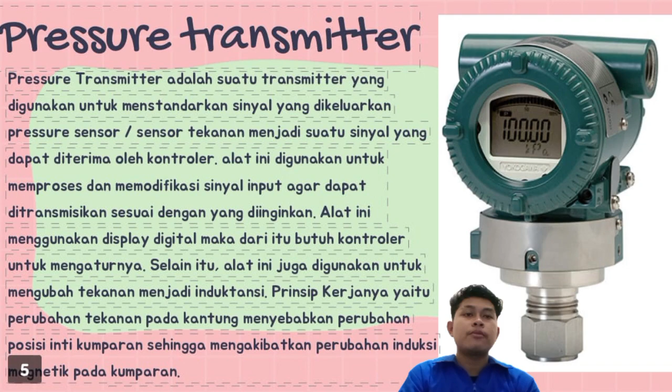What is a pressure transmitter? 1. Physics. Pressure, P, is defined as the amount of force, F, acting per unit area, S. 2. Types of pressure: absolute, gauge, differential.

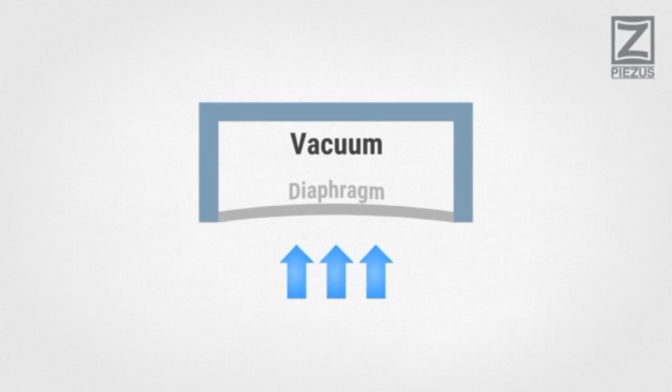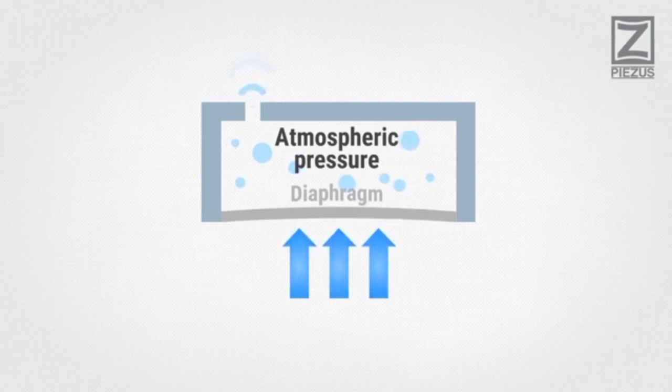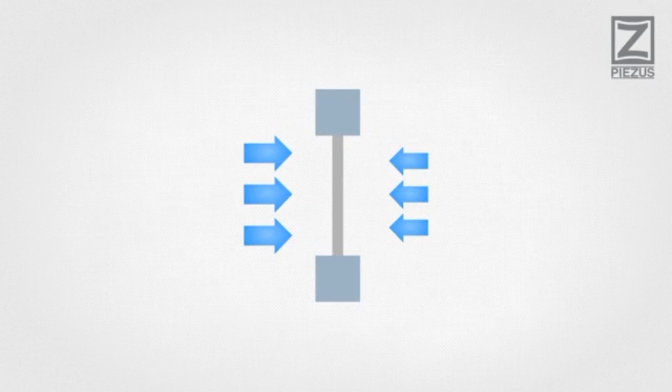Measuring absolute pressure. Absolute pressure is measured relative to vacuum. Measuring gauge pressure. Gauge pressure is measured relative to atmospheric pressure. Measuring differential pressure. Differential pressure is the difference between pressures applied to the opposite sides of the diaphragm.

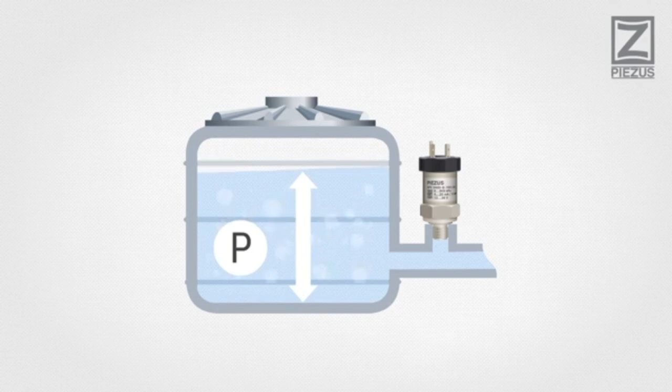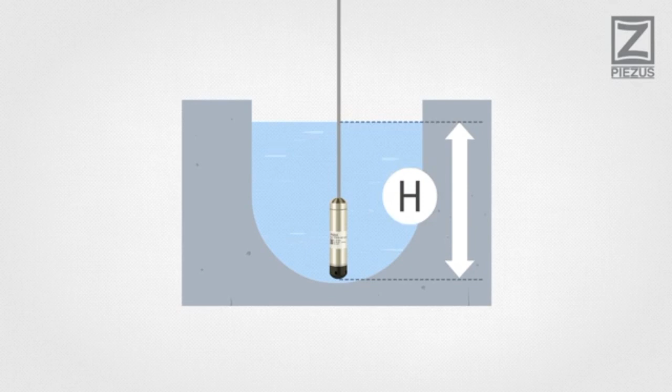3. Types of pressure transmitters. There are two most popular types of pressure transmitters: externally mounted and submersible. Externally mounted pressure transmitters are used for measuring pressure and level of liquids and gases and usually have a thread or a flange mount. Submersible pressure transmitters are used to measure level of liquids. They are also called hydrostatic level transmitters.

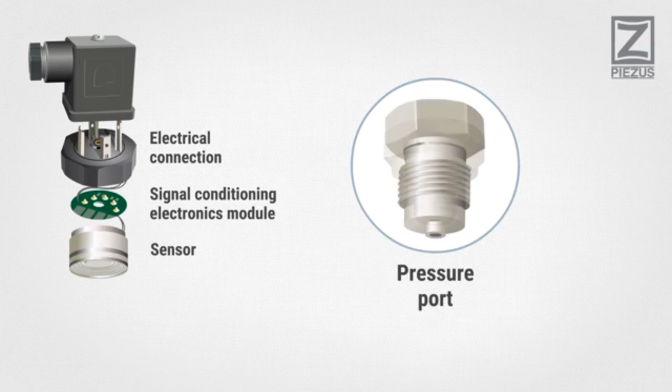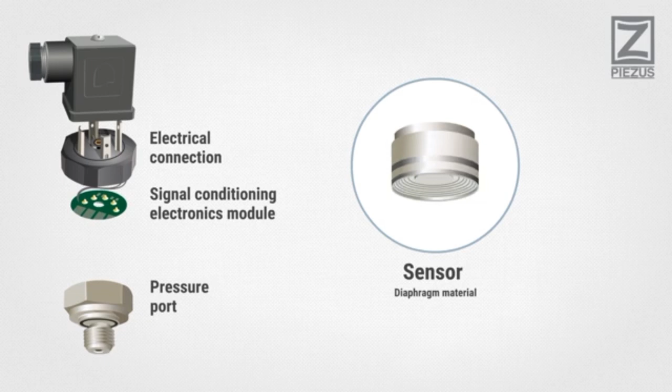4. What is inside of a pressure transmitter? Pressure ports allow connecting a pressure transmitter to the process. The sensor element transforms diaphragm deformation under pressure into an electrical signal. The signal conditioning electronics module converts the sensor signal into a standard normalized electrical output, such as 4 to 20 milliamps, 0 to 10 volts, 0 to 20 milliamps.

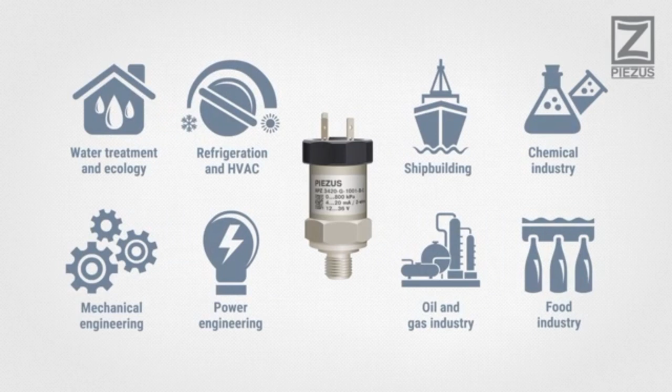Various models are also capable of digital communication using HART or Modbus protocols. The electrical connection is used to wire a pressure transmitter to a measuring system. A wide variety of ordering options allow you to configure a pressure transmitter to be successfully used in various technological processes: refrigeration and HVAC, food industry, water treatment and ecology, chemical industry, mechanical engineering, shipbuilding, power engineering, oil and gas industry.

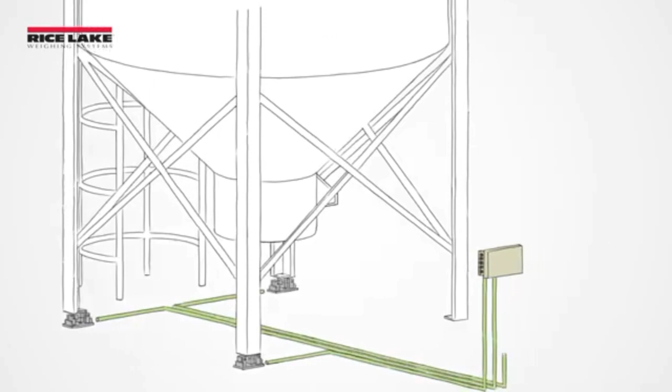A junction box is an enclosure for electrical connections used to bring multiple load cells together to function as a single scale. It houses wire connections from multiple load cells in order to average their signals and send the value to a weight indicator. Since all load cell connections come into this one box, a junction box is the most convenient place to troubleshoot system errors.

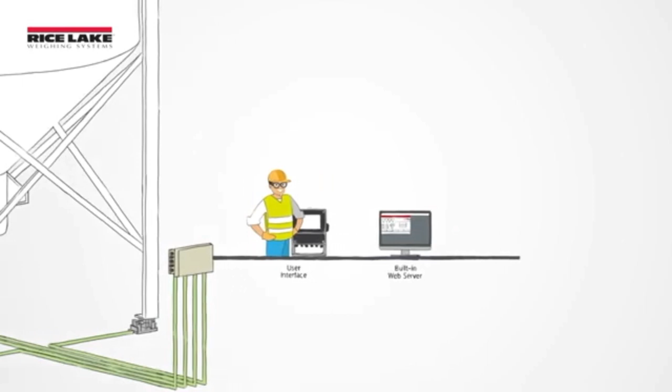A junction box can have multiple terminals, depending on the number of connections you need to make. The junction box can provide protection against the intrusion of foreign bodies, dust, and moisture. They can also be equipped with surge protectors to shield electronic equipment from transient overvoltages commonly caused by lightning and electrical shock.

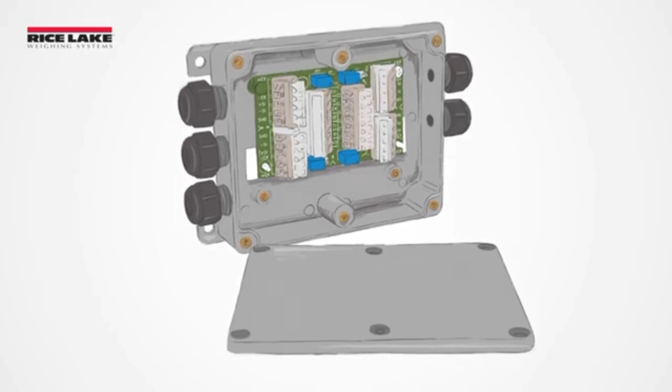For hazardous areas, there are special junction boxes with ATEX and FM certification, which are manufactured for explosive atmospheres. The way the junction box is constructed plays a role in how durable and reliable it is. Most junction boxes are either made of plastic or metals. Plastic is lighter and less expensive, but stainless steel is ideal for harsh and washdown environments.

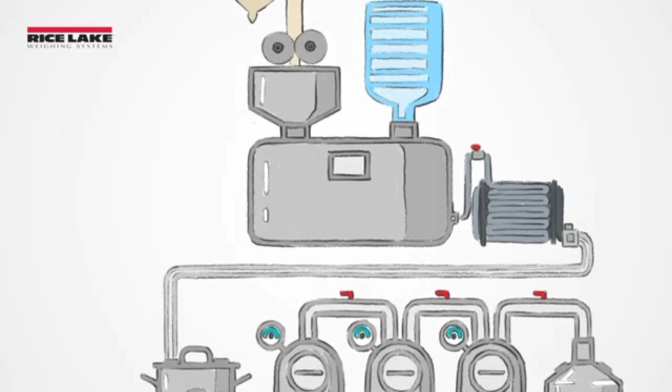By bringing multiple load cells together, junction boxes enable the quick integration of weighing into pre-existing structures, such as weighbridges, large platforms, hoppers, tanks, and silos, to create custom-scale solutions. These are ideal for applications that require filling, dosing, batching, check weighing, or sorting by weight.

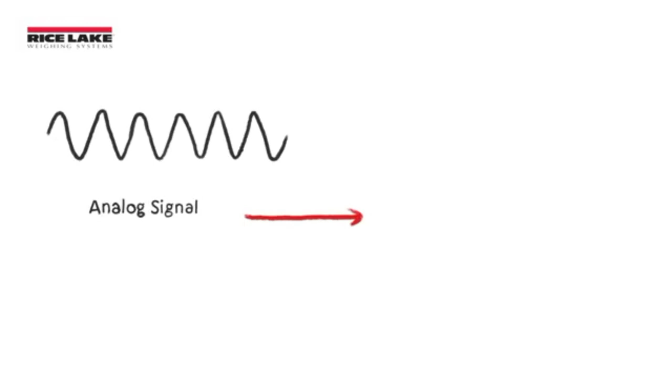A digital junction box can receive signals from analog load cells and convert them to a digital format, allowing advanced diagnostics, emulation, and troubleshooting. There are many different types of junction boxes. Each type works best for certain applications, and choosing the perfect junction box will depend on your unique application.

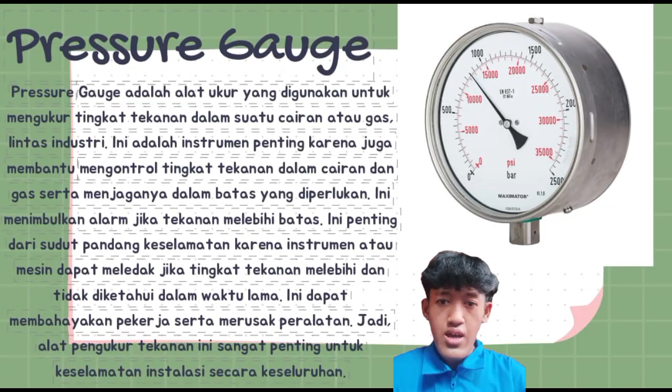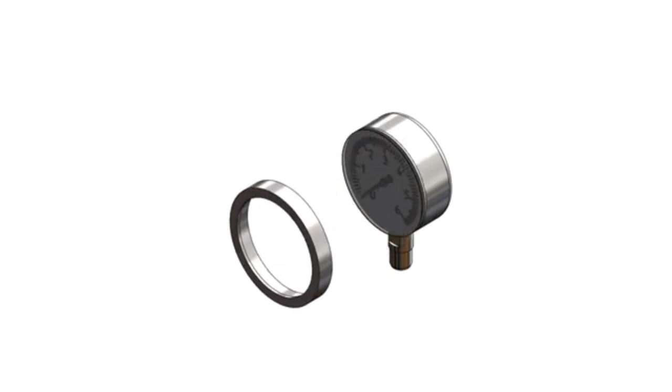The operating pressure in hydraulic or pneumatic systems is measured with respect to atmospheric pressure by pressure gauge. The most common pressure gauge design was contrived by Eugene Bourdon. It used a curved tube design as the pressure sensing element. Pressure gauge with Bourdon tube contains case, socket, Bourdon tube, plate, mechanism, dial with scale, pointer, window, ring.

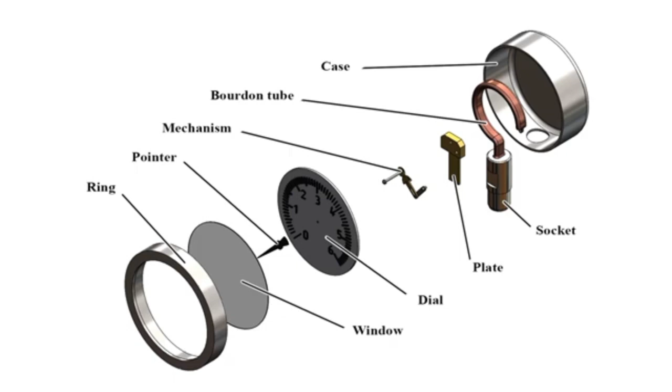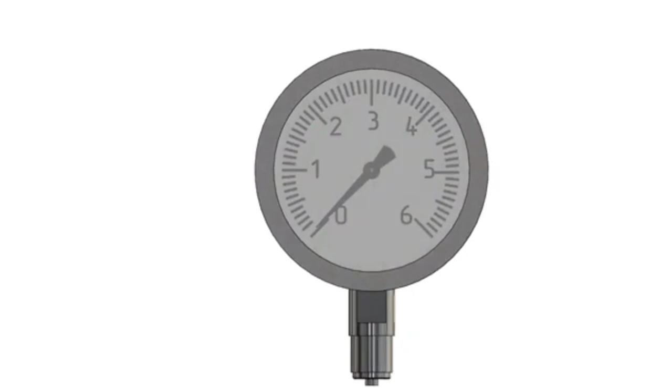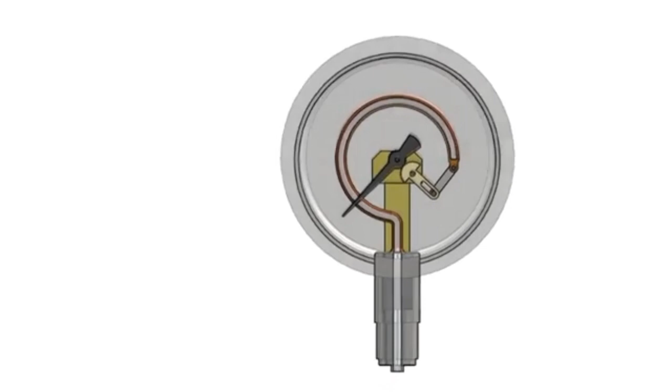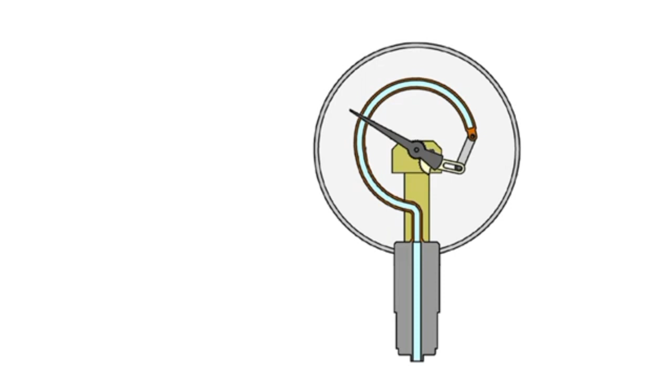The pressure gauge housing is most often made of stainless steel or plastic. Bourdon tube is made of copper, brass or bronze. The pressure difference between the pressure in the system and atmospheric pressure causes the free end of the Bourdon tube to deflect accordingly. Movement is transferred via the mechanism to the pointer. At this moment, the pressure decreases and the Bourdon tube returns to its first position.

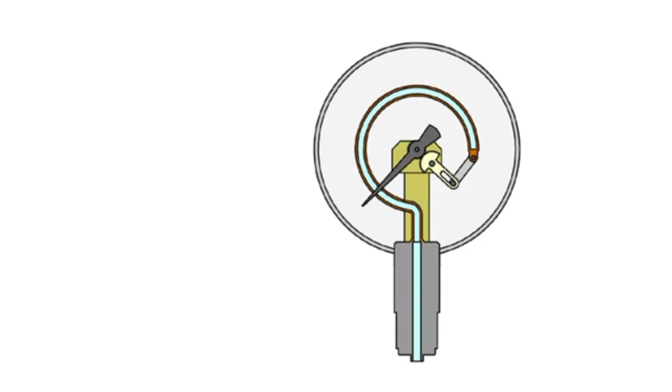Let's begin with a look at the basic components of a typical spring-operated PSV. First, the spring, the spindle assembly, inlet, outlet, and the pressure adjustment screw. In operation, inlet pressure exerts a lifting force on the spindle. This lifting force is reacted against by the downward force of the spring. If the inlet pressure is increased to the point where the total upward force overcomes the spring force, the valve opens.